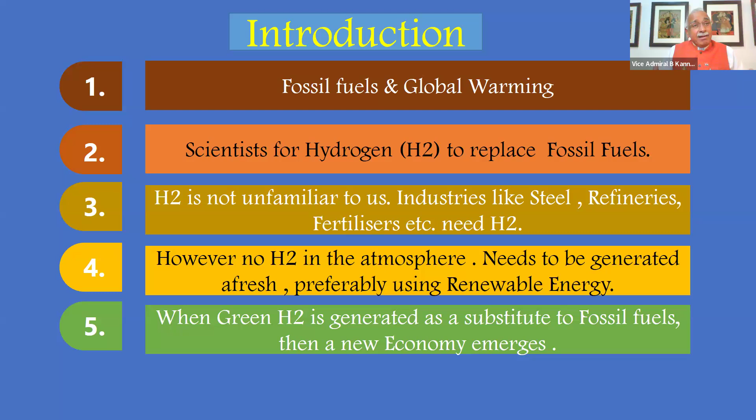So if green hydrogen is generated, that means you use renewable energy to generate hydrogen, then you get it almost free. Sun's energy you get free. You have to spend some money on solar panels to generate electrical energy, and use that for getting green hydrogen through some electrochemical process. Then you have the substitute hydrogen available to replace fossil fuel without very much expenditure.

And that is the emergence of a new economy. A new economy evolves when you take hydrogen by some process from nature, using sun's energy, and then use it for industries. Obviously it should give you some benefit. We'll discuss that, and how does this economy work.

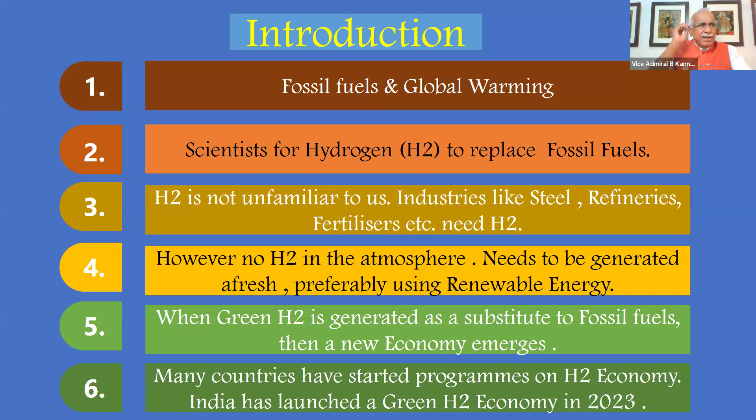What is India's plan? Where are we now? What is holding it up? That's what we're going to discuss in the next half an hour. Many countries have launched programs. India has also launched it in 2023, as I told you.

So let us see hydrogen very briefly, because that's very important to understand. Hydrogen, H2, which is what I'll be referring to, is colorless, odorless, and very light.

Can you believe that 1 gram of hydrogen occupies 11 liters of volume? It is so light and so much volume it occupies. 1 gram is equal to 11 liters. So it is a gas which occupies a lot of space. If you compress it and cool it, the volume comes down, but at normal conditions of temperature and pressure, it occupies a lot of volume.

This is the nature of hydrogen, which poses some problems as you go along, we'll discuss. It doesn't get dissolved, highly inflammable, and it's got high energy content. It can deliver energy to another place where it combines with oxygen. We'll discuss that as we go along.

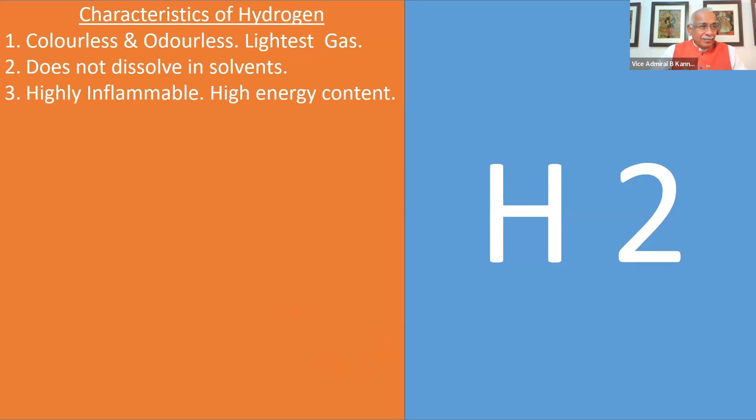It is required for many engineering applications. I already told you about steel, fertilizer, etc.

Atmosphere presence is very, very small. I've given the figure there. So it is actually not existing in atmosphere, but abundantly available in the universe. Water is H2O, so hydrogen is available in water. Hydrogen is available in fossil fuel also, be it coal, be it petrol, diesel. They're all compounds of hydrogen.

So hydrogen is available, but you have to take it out of water. You have to take it out of these chemicals.

Voluminous gas, I told you. So transporting hydrogen, one has to be very careful. It is risky, so normally they transport it as a compound, and later you can take out hydrogen from it, like ammonia. NH3 is ammonia, that is one way of transporting it when you want to transport large volumes of hydrogen.

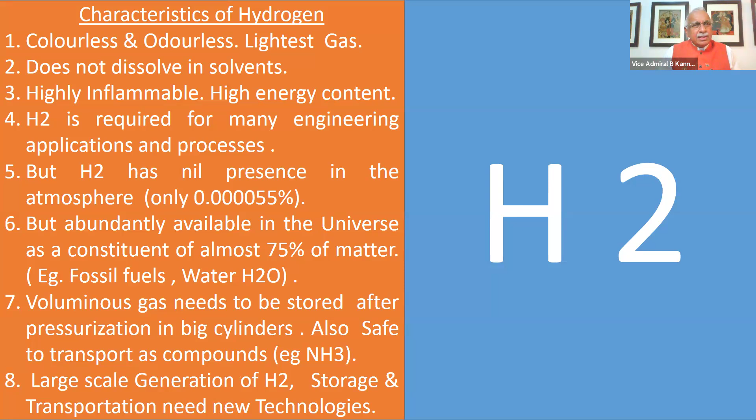So we have to generate hydrogen to get fuel, the new fuel, and then we have to store it, transport it, and give it to hydrogen bunkers, like petrol bunkers, and then they should be able to distribute. So there are a lot of new technologies involved, and we must see how India is coping with all this in the hydrogen economy program.

So environment has got water and air. If you give water, which is H2O, you can generate hydrogen, transport it, utilize it in some industry like steel, cement, etc. And there again it will come back to water because it takes oxygen from air and water comes back to environment. So this is a sort of hydrogen cycle which is abundant in nature.

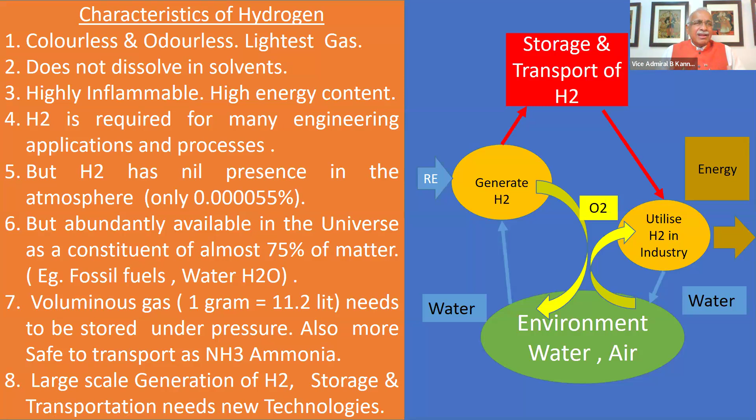So much hydrogen is available, we have to only spend time. We have to find methods of generating it, mostly from water. So who all require hydrogen now? Let us see.

First is steel. Iron ore is given to furnace, then you get pig iron and steel. I'm not going to discuss those issues, but hydrogen is required in the furnace so that the oxygen in iron ore is taken away by hydrogen to form water. It will become steam and go out, and the iron is separated from iron ore, which is converted, purified, etc. to form steel.

But iron ore also has got - how do you get the heat? You have to heat the furnace and pass hydrogen to get this. And heating is done by coal, and coal and oxygen react to form carbon dioxide, which is what you're worried about because of CO2.

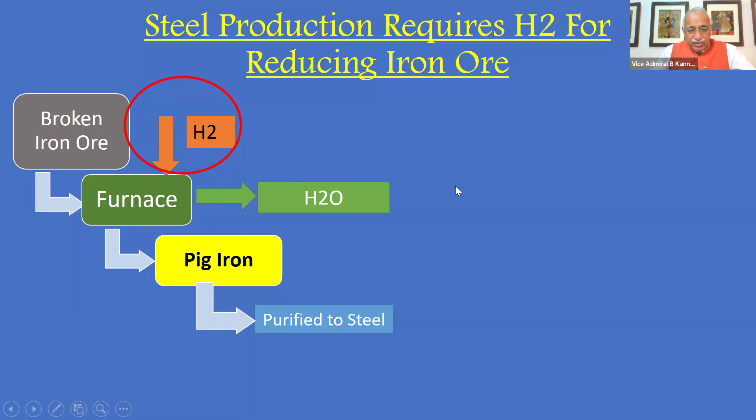So India has got about 50 steel plants producing 150 million tons a year. All of them use hydrogen generated from a coal-based process. That means coal is heated up, steam is passed over it, steam is splitting into oxygen and hydrogen. Hydrogen is available separately for the steel manufacture, and coal carbon forms carbon dioxide and pollutes the atmosphere.

If you can give this hydrogen by some other method other than burning coal, then we may be able to reduce the carbon dioxide emission, which is causing global warming. Just to give a detail, 50 kgs of hydrogen is required for 1 ton of steel to be made, so a large volume of hydrogen is required.

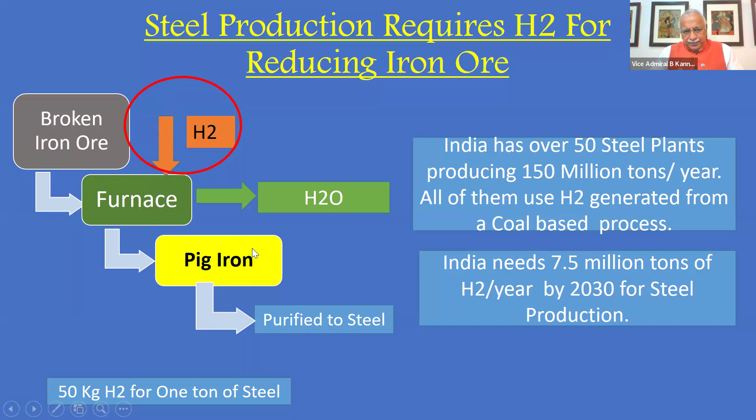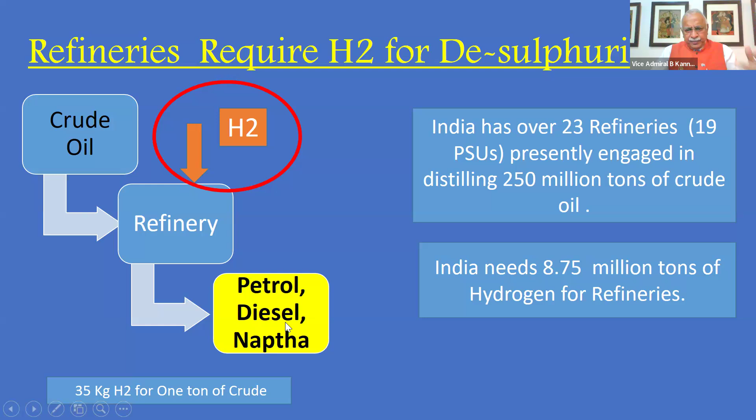Through this, you have to feed it from somewhere, how to feed it we will see. I will just take refinery. Refinery also requires hydrogen for desulfurization of the fuel, petrol. So this hydrogen is also produced by a coal process, and they pollute the atmosphere, and you get petrol, diesel, naphtha, etc. But it requires 35 kg hydrogen for 1 ton of crude to be refined. There are 23 refineries in India, details are available on the slide.

Chemical industry, ammonia to be made - again hydrogen is required. How is hydrogen bought? Hydrogen is made from coal being heated up and steam passed, and hydrogen comes out, and CO2 gets emitted from the factory, polluting the atmosphere. So I give you 3 examples: steel, refinery, and a chemical plant producing ammonia.

All of them require hydrogen, and they get it by burning coal and passing steam over it. Steam is H2O, so it splits. H2 is collected separately; oxygen combines with carbon, and this is carbon dioxide. Now, this is a big issue. If you continue like this, global warming cannot reduce, because one of the important aspects in global warming is burning of coal. That you should reduce.

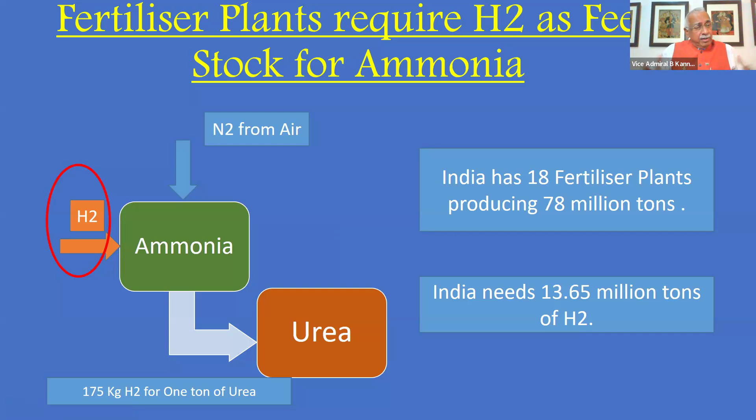I'm talking only about industries where coal is burned for producing hydrogen. Suppose you can connect a pipe here, with hydrogen coming from somewhere else; then the coal need not be burned. In all those 3 factories, you remove the coal and put a pipe which will give you hydrogen. A big pipe which will carry lots of hydrogen to the ammonia plant.

So let us see how hydrogen is produced in fertilizer plants. As I told you earlier, there are 2 ways. One is coal is burned in a furnace with steam. Syn gas comes out, carbon monoxide and hydrogen, that is separated. Hydrogen comes out separately. Carbon dioxide comes out as a black cloud to the atmosphere. If you burn coal, this is your output, hydrogen and carbon dioxide.

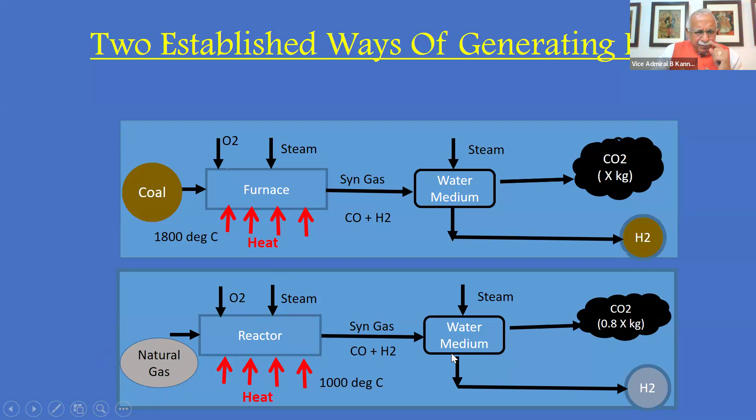Another method is you burn natural gas. Natural gas is a little expensive for India because we don't have too much natural gas reserves, so coal is cheaper for us, so mostly we use coal. But many of the ammonia plants, etc., use natural gas; cement also uses natural gas. Natural gas is burned, same technique, same method. CO2 comes and hydrogen comes out. Here CO2 is less. You can see the black cloud is slightly smaller. There's a difference between these two.

When you burn coal, this hydrogen is called brown hydrogen. That's a name given. If you say brown hydrogen, that means you're burning coal. And it is given to steel, refinery, fertilizer plants. So I told you when the pipe comes there, it actually comes from here. This is a part of the factory which is elsewhere, and from there the hydrogen comes. Suppose you burn natural gas, it's called gray hydrogen, and that is mostly used in fertilizer plants. So this is how it is being done today.

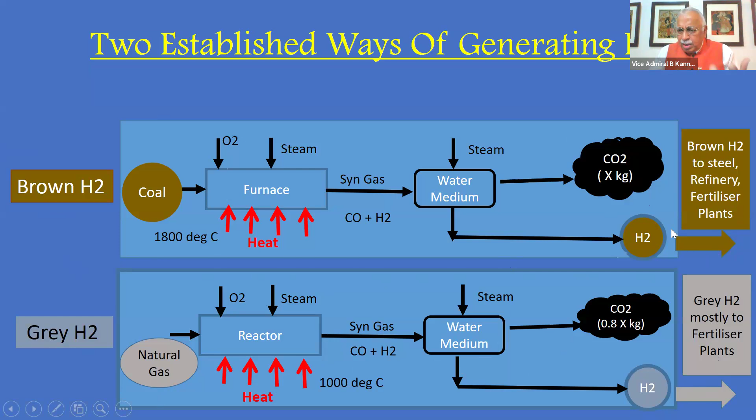But both gray and brown emit carbon dioxide. Brown emits more, gray emits less. But they are causing global warming. So India's total emission of carbon, if you look at it, 25% is by industries, all industries put together. 45% is by power generation, thermal power plants producing electricity for you. They burn coal, they produce steam, steam turbines produce electricity, and you get electricity in your house. Industries get it, hospitals get it, everywhere. Supply is given by power generation.

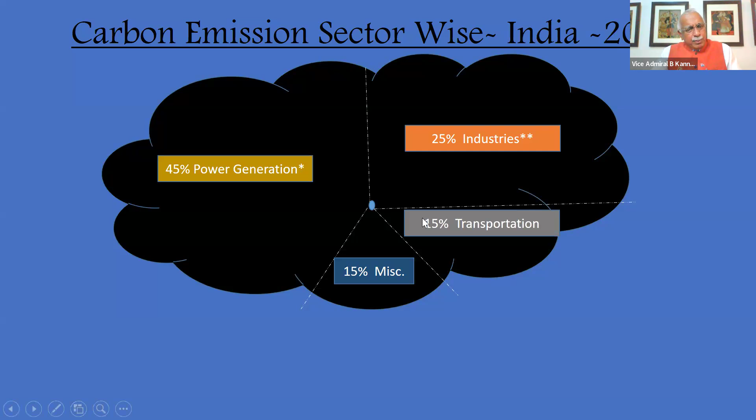So 45% comes from power generation, 25% is industries. Transport, trucks and buses which run on diesel, produce a lot of smoke; cars, which run on petrol as well as diesel, produce less smoke because of smaller engines, and that is about 15%. Otherwise, there are some other emissions which are about 15%. So India's carbon emission is 4,100 million tons every year, and it is not reducing, it is only increasing, and we are causing more global warming. So it's a serious issue for us that we have to reduce the size of this black cloud by some method.

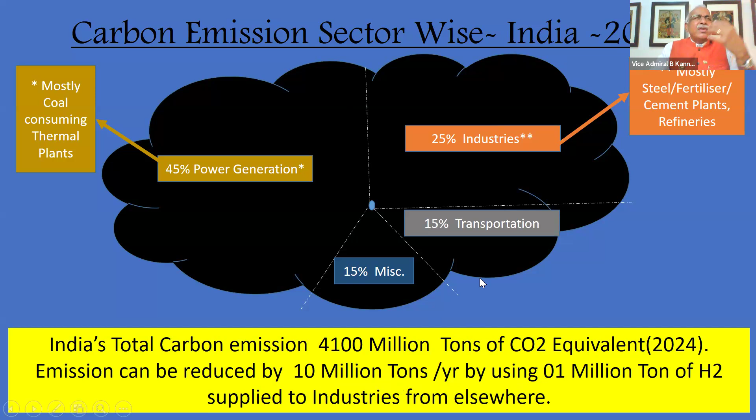Now, go back to industries. If you can give the industries hydrogen through some other pipe coming into the factory, then they don't have to burn coal. The carbon emission reduces. It will reduce by 10 million tons every year if you use 1 million tons of hydrogen. So you require lots of hydrogen to be produced by some method. What is that method? We will see.

So the method used for green hydrogen is electrolysis. All of you have learned in school: if you split water using a battery supply, you will get hydrogen and oxygen in a 2 to 1 ratio. Now you have to produce lots of hydrogen, so you have to go for an electrolysis plant, and the plant will be something like this. This is the first plant made in India, in Hazira, in Gujarat, by Larsen and Toubro. They have designed and made this. You can see how big that electrolysis plant is.

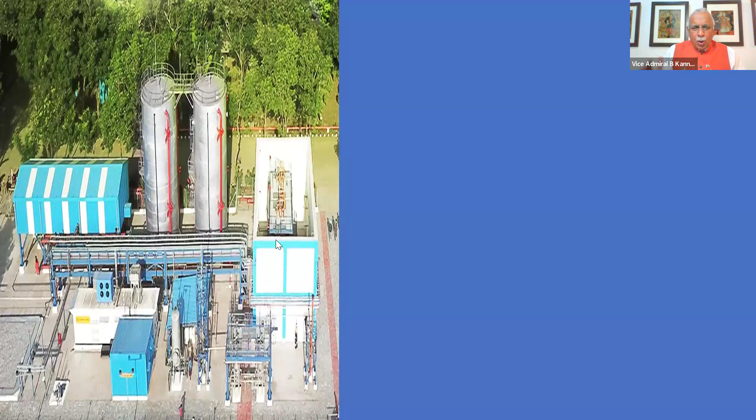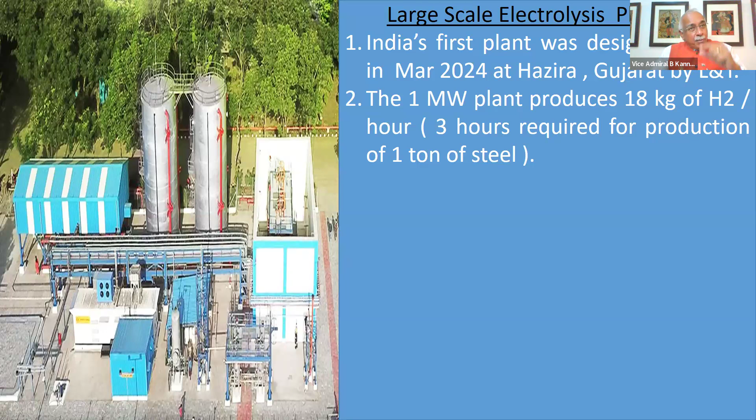It works on 1 megawatt of power, and it produces in 3 hours whatever hydrogen is required for 1 ton of steel. And India is producing 150 million tons of steel. So you can imagine how much green hydrogen is required, how many electrolysis plants are required at different places to produce hydrogen without burning coal. Obviously, a lot of money is required to make all these electrolysis plants. They may work on solar, but these electrolysis plants have to be made by us to make sure you don't burn coal.

Now, if you get hydrogen from an electrolysis plant which is running on solar power, it's called green. Earlier, I told you brown is for coal and gray is for natural gas. Now, green is for solar energy. And if you want to make 1 million ton of green hydrogen, 1,000 plants like this are required.

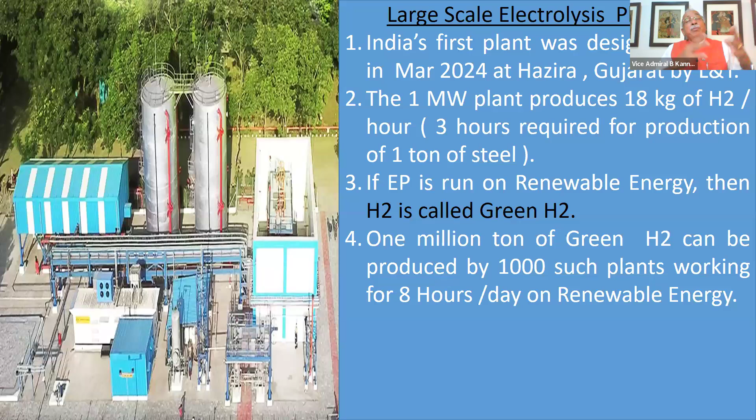1,000 plants are required. And you have to put these plants very close to steel, cement, fertilizer, refinery, because the hydrogen pipe has to go inside. You can't run it over kilometers and kilometers. So you have to co-locate these electrolysis plants, hundreds of them next to each refinery, or produce a very big one which has got the capacity of 100 such electrolysis plants. This is the first one which has been made for 1 megawatt.

So the government has formed a national mission to make electrolysis plants in plenty, design them, build them, and get them fitted in various industries which are burning coal. So that is the first step. So what are the challenges? I've got 5 challenges.

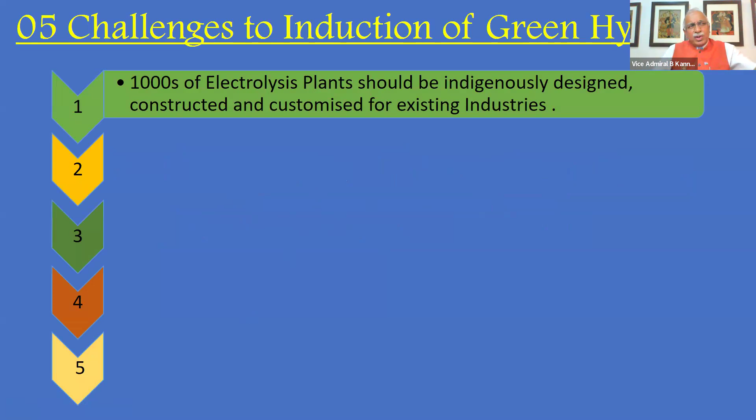The first challenge is the thousands of electrolysis plants that we make in the country. They had to be fabricated, constructed, and fitted and customized to the industry which is going to use it, depending upon what pressure of hydrogen and what flow of hydrogen they want. Second, they have to be fitted inside the factory premises, so that you don't run long distances of pipes or have to send by trucks.

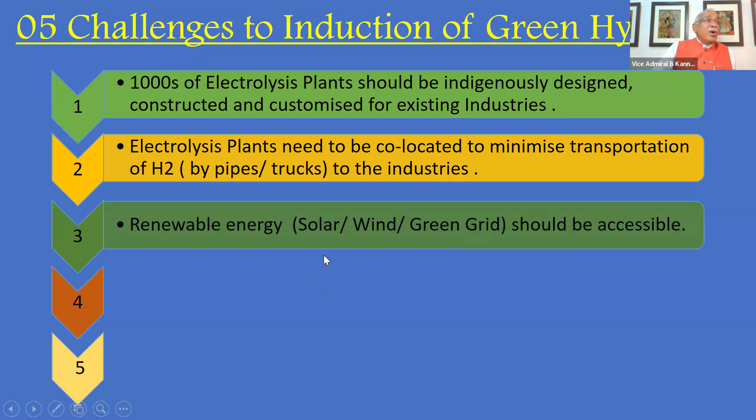And they have to work on renewable energy, so you require a solar farm somewhere nearby, or you have to get it from a green grid, so that you're not using energy from a thermal power plant which is burning coal. Then it is not worth it. You have to use solar or wind energy only. You have to use renewable energy. In India, for information, nuclear is also called renewable. Hydro is also called renewable. So we will generally say renewable energy is required.

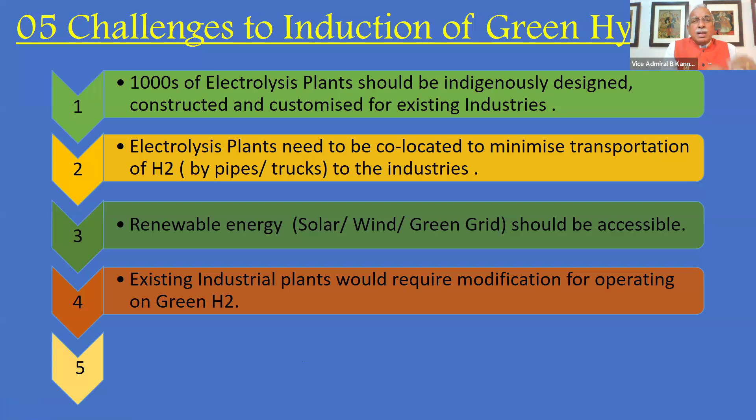And most important, the industrial plant which is presently burning coal has to be modified to take hydrogen from somewhere else. So the coal side has to be closed down and the hydrogen pipe has to come in. So some changes are required in that factory. And you have to keep the cost of this green hydrogen as low as possible. Otherwise, your green hydrogen mission will not be cost effective. It's an economy which has to run. So you have to minimize it by making sure green hydrogen is used elsewhere also.

So what is the thrust of this mission? Produce lots and lots of green hydrogen, give it to the industries wherever they are using coal or natural gas, give it to cars and trucks to run on green hydrogen, use it for power generation by mixing it with natural gas, or give it for cooking in your house, again by mixing it with natural gas. So these are the various ways you can use the green hydrogen which you produce from solar energy.

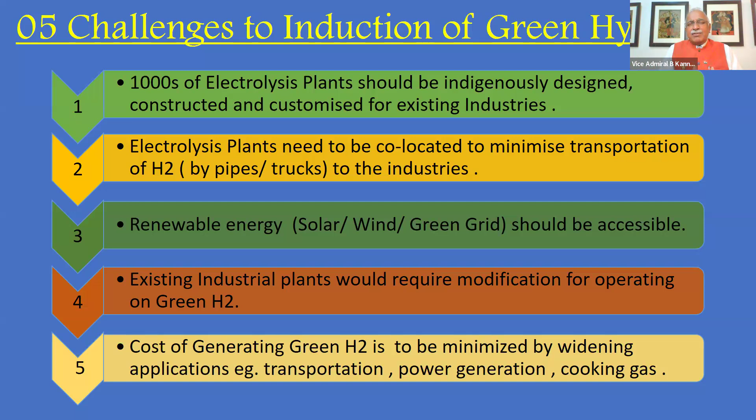Why do you want to produce so much green hydrogen? Unless you go on a very high scale of producing green hydrogen, the cost per kilo of hydrogen will not come down. And that is important for this economy. So there are challenges, but the most important challenge is making lots of electrolysis plants, getting them fitted near the industries, and modifying the industrial plants to take hydrogen from another source and not burn coal.

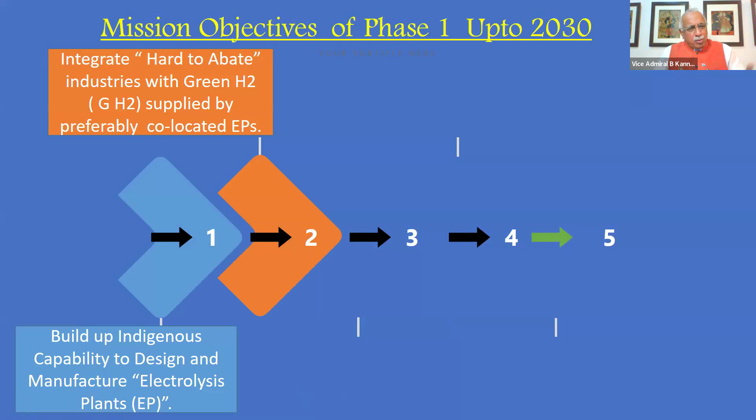So a national mission was launched 2 years back. It has got 2 objectives, one for 2030 and one for 2050. I'll quickly run through 2030. First, as I told you, make lots of electrolysis plants. I'll call them EP. Second, give them to those industries which are burning lots of coal, and they are called hard to abate. It will be very difficult to change these industrial processes that easily, but we have to go through it to stop coal burning and go for green hydrogen.

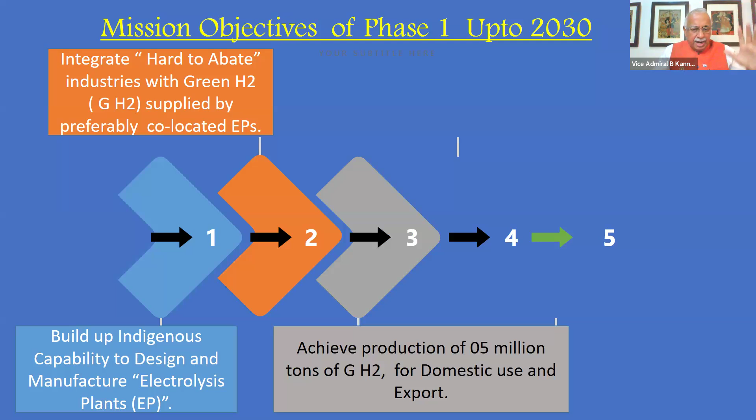Third, we want to produce 5 million tons by 2030. That's what the government says. Where we will reach in 2030, I'll tell you later. But the government says we want to reach 5 million tons by 2030. Then give green hydrogen.

I told you, produce 5 million tons is lots of green hydrogen. So give green hydrogen to thermal power plants which are burning coal, don't take coal. There you use natural gas and blend it with green hydrogen. Give green hydrogen for trucks, cars, and even for gas supply to your house, piped gas supply to your house.

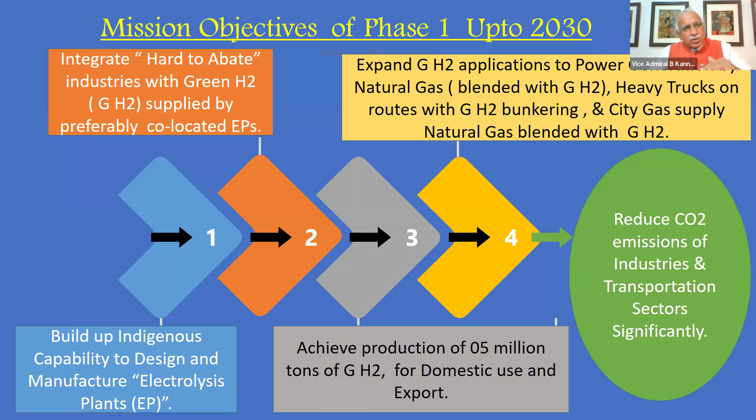So this is what is being planned, and they want to reduce the emission of carbon dioxide from industry, transports, and even domestic sectors. By 2050, the goals are even bigger. The mission says we'll produce 28 million tons. That's what the aim is, almost 90% with green hydrogen. You can also have normal electricity being used for hydrogen. Then it is not green. It will be called by some other name. But 90% they want green hydrogen.

They want to export green hydrogen to Japan, Korea, and European Union because they don't have so much of solar energy like India has. They are up in latitude. They don't get solar energy as much as India gets. So India has got an advantage. Lots of solar energy in India. Utilize them to produce as much green hydrogen as possible, which is the fuel for tomorrow.

Like Middle East has been giving lots of oil for the last 100 odd years. Now onwards, whoever gives a lot of green hydrogen will be having the position of power because that is the new fuel. But it has to be green. It has to be based on solar energy. And countries close to equator will have the capability, the resource to produce green hydrogen.

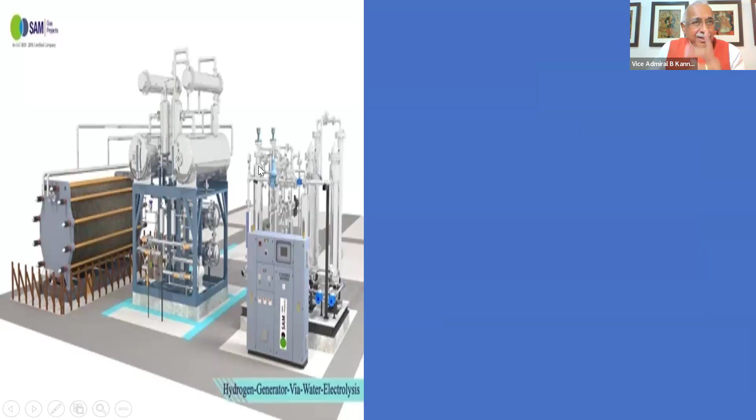So I will talk about the present status of phase one. Phase one is 2030, you may remember. At present, we have started making lots of EPs, electrolysis plants. It has been set up in Hazira, I told you, by Larsen & Toubro, then in Bikaner by a company ACME. GAIL has got one in Vijaypur; BPCL, HPCL, NTPC, all have small electrolysis plants. Why small? Because it's a technology initiative. It is being inducted. They want to get familiar with the technology of the electrolysis plants and how it will produce the desired hydrogen pressure for that particular industry.

So the moment they are comfortable with it, they will expand and produce as much hydrogen as is required to reduce the coal burning. I'm not saying coal burning will become zero, but they will significantly reduce it. Today, we are only producing 38 megawatt of green hydrogen through electrolysis plants, which produces 8 tons a day. That's about 2,500 tons a year. But we want to produce 5 million tons. A long way away. We have to do huge upscaling of electrolysis plants and integration with industry by 2030.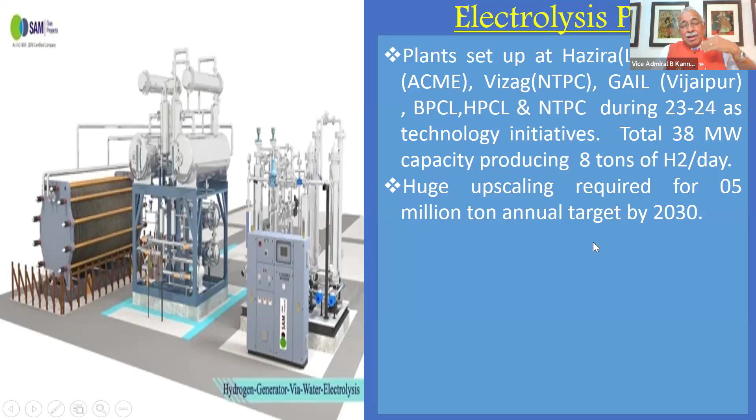Will it happen or not happen? We'll discuss. What government has done, they have shortlisted 8 firms for producing EPs, electrolysis plants. And PLI scheme is being implemented so that their production goes fast. So far, it has not started. The firms have been identified, but the contract has not been signed. So another 1 more year. So it will be 2026 by the time it starts. So the 2030 target is doubtful.

5 million tons of production of green hydrogen is almost ruled out. I don't think we will reach there, but it will be something lower than 5 million tons. I've done some calculation, I will tell you.

Meanwhile, India and Egypt have signed a joint venture to set up near the Suez Canal to produce 20,000 tons of green hydrogen, so that many operations which are required in the Suez Canal can be run on solar energy. This is just for information for you, because Egypt does not have that much of a technological base, so India is giving the support.

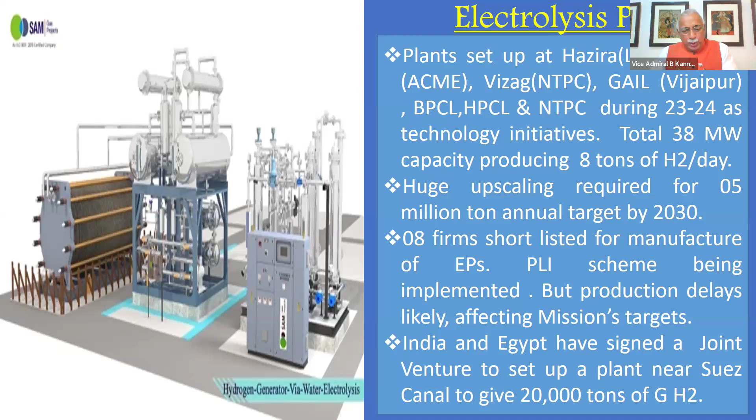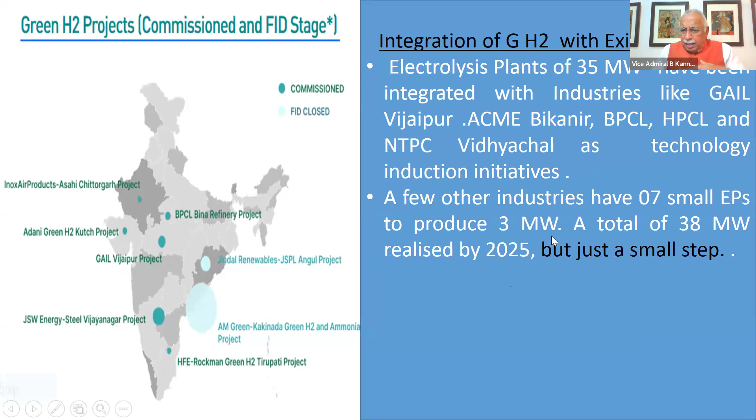Now, the integration with industries is happening in all these places which I told you some time back, where electrolysis plants have been set up. I told you 35 plus 3, total is 38, but that's only a small step. We require 11,000 megawatts of electrolysis plant for 1 million ton. For 1 million ton of gas to be produced, 11,000 megawatts of electrolysis plants are required.

That means they should be drawing that much power from the grid or solar farms or green grid to run and produce the hydrogen we want. And if you want 5 million tons, 55,000 megawatts is required. Now, this is not going to be achieved by 2030. Even though the hydrogen mission is very optimistic, I have my own doubts whether they will reach there, because electrolysis plants are still not made. They're only made as samples, and initial kits have come out.

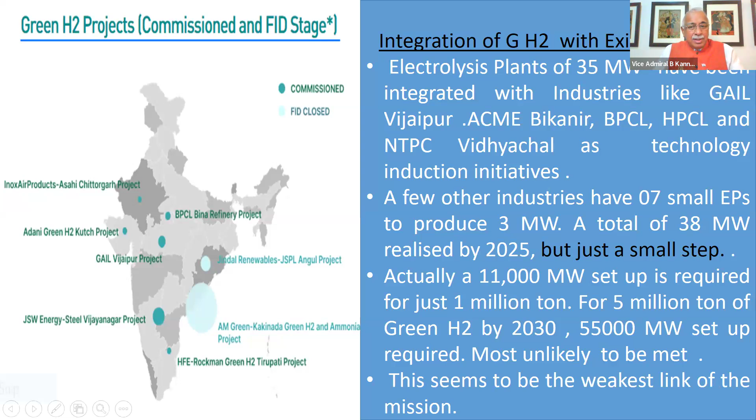So the PLI scheme is yet to kickstart. So this is going to be a problem area for us, and this is going to be the weakest link in the mission. It's not solar power. We have already gone to 150 gigawatts of solar power in India, so solar power is behind us. We can generate. But electrolysis plants, which will produce hydrogen, need to get ready. Thousands of them. And we have made only some small numbers, about 15, 16 of them so far.

Meanwhile, Leyland and Tata have both made trucks which will run on green hydrogen. They have been successful in doing it. So what the government has done, they have identified 10 sections of highways, in the eastern corridor and western corridor, where lots of industries are there in Maharashtra, Gujarat, Andhra Pradesh, Orissa, Tamil Nadu, and I think one portion in Kerala is also there, where they have identified those highways as green highways for green hydrogen trucks.

Why do you have to identify? Because along these highways, like petrol pumps, you require green hydrogen bunkers so that these trucks can take fuel from there. So the trucks are getting ready. The truck sample initial run is already completed, and now production has to start at Leyland and Tata. They will run only on the route which has been identified, because that's the only place where they will get the hydrogen fuel.

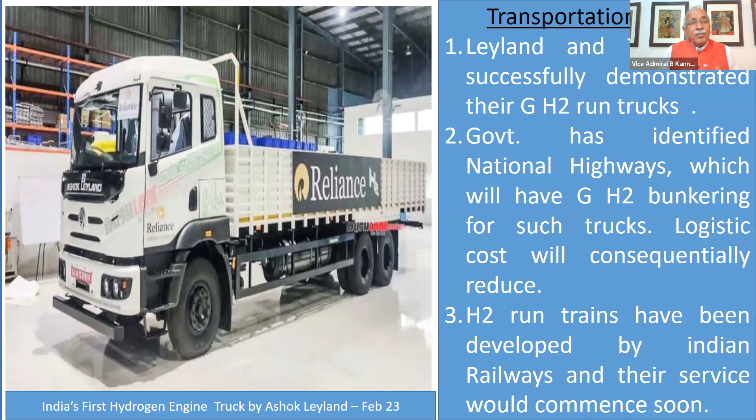In addition, the government has made the first hydrogen train. It was ready by the middle of August 2025. It is a 12,000 horsepower train. This will run between Jind and Sonipat section of Northern Railway. And this is going to do the trial run very soon. The date was sometime in December, but I'm not sure whether the date will still be met.

But it is out of the factory which has made this hydrogen train. Now the train has to do some trial runs and it will start on this particular section very soon. So on the transportation side, trucks and trains will happen from 2026 onwards. But I don't think cars will come. Even though theoretically it is possible to run cars on hydrogen, I think cars running on hydrogen fuel are not there, as per me, for the next 5 years. It's not going to happen.

One or two cars may run here and there for demonstration, but they will not be available from car manufacturing plants to the public. Definitely not before 2035. After that, you may find some models come out. It has advantages, but at the moment the focus is on electric cars, EVs, which are also going to reduce pollution. So that's a good thing. But hydrogen cars are not going to be there soon.

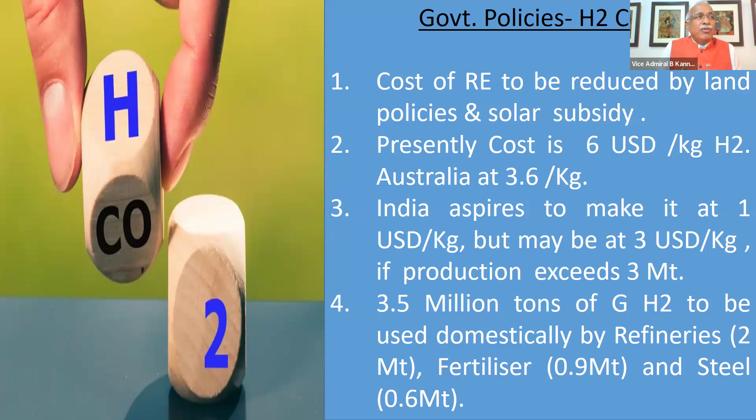Steel is not so enthusiastic about producing with green hydrogen, because a lot of consumption of steel takes place within India. It's okay. But if you want to export steel, which we are doing presently, you will get a higher rate if it is using green hydrogen, and it's called green steel. So if you want to have higher business in steel and exports, then you have to produce green steel. I think Jindal's JSPL plant in Orissa is trying to be maybe the first plant which will produce green steel in India.

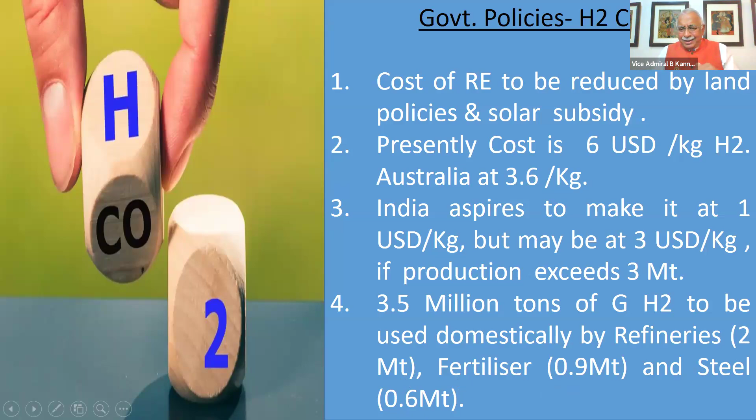But as it stands, refineries will take 2 million tons, fertilizer about 1 million tons, and steel plants much less.

So let me come to the conclusions of today's techno-economic talk. We are talking about the green hydrogen mission.

The first conclusion is we have initiated projects on the engineering side: electrolysis plants, safety standards. As I told you, hydrogen needs to be handled with care. It's highly inflammable, so the safety standards required are different. R&D is required in storage, pressurizing compressors, and containers which can take hydrogen. If you want to export it, it has to be in huge drums which can take very high pressure.

And some renewable energy projects are also being started. It's a good effort which the government has done, and I think we've already kick-started this activity. 8 companies have been identified for making electrolysis plants. Good start.

We have made only 38 megawatts. And as I told you, 8 firms, but they have to produce thousands of electrolysis plants, which will utilize at least about 33,000 megawatts of power to produce 3 million tons. Now that is going to be difficult, and a lot of effort is required to achieve that.

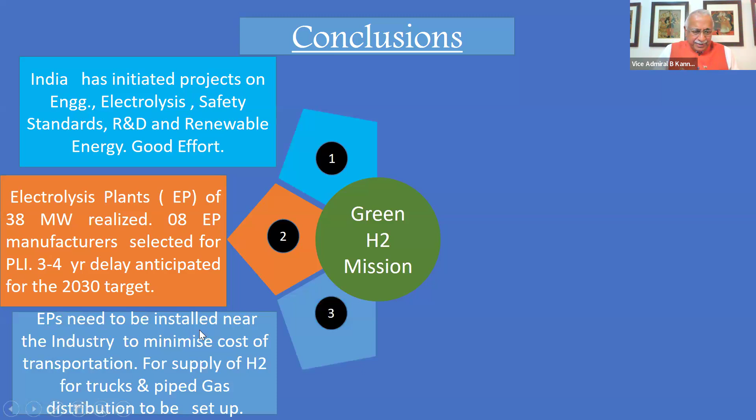Now the third conclusion, which is emerging from the challenges: you can't have the electrolysis plant here and the steel factory 10 kilometers away. You'd require 10 kilometers of pipe. So put the electrolysis plant near the steel plant, preferably inside the steel plant premises, so that it closes down the coal burning and takes green hydrogen from the electrolysis plant located nearby.

Now, if you want the electrolysis plant output to be given for trucks and piped gas, obviously you'll require bunks to be set up along those identified highways. If you want distribution done in a particular city, then you require to lay pipelines, like many cities have got natural gas being distributed. Bombay has definitely got a huge portion, I think Cochin is also going to get it, and maybe a few other cities as well. So this is going to pick up.

But if you want to mix green hydrogen with natural gas, trials of about 5% mixing have been completed. Maybe it'll go to 10% or 15%. Once you do it, hydrogen's energy can be used for burning the kitchen burners in the house.

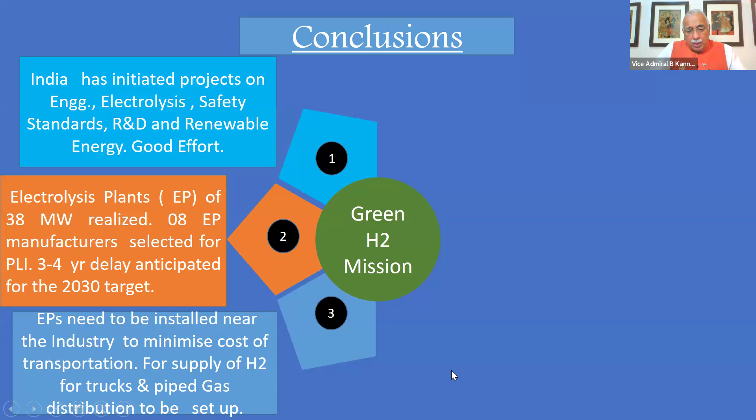Then the solar farm is also required to be near the industry, because the electrolysis plant is going to be near the industry, and the power required for it has to come from the solar plant. If it is kilometers away, then you have to run overhead grid lines, cables, etc. To minimize that, you want it closer.

So land is a huge and very important commodity - large areas are required for green hydrogen. That is a challenge which some states will find difficult, to give land for all these electrolysis plants and solar farms. In some places it may be easier. It's going to be industry location-specific, but I don't see any major holdup. Solar farms can be at a distance, with power coming by grids from there, but electrolysis plants need to be located near the industry.

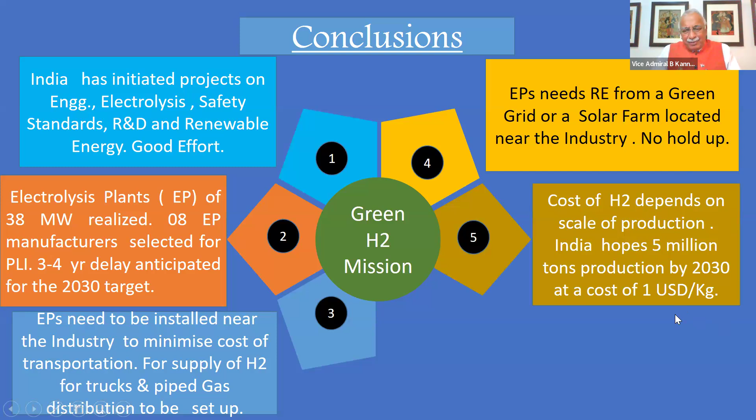Cost of hydrogen we discussed. We want to make it $1, but it's not going to happen. At best, I think we'll produce it at $3 per kg by 2030. Even if that happens, I told you, your car will run 100 kilometers.

And the fifth one, you have to explain - okay, I'm restarting now. So the last point is, the government wanted to produce 5 million tons at $1 a kilo by 2030. Now that is not going to be possible from the way it is going.

Some study which has been done says that at maximum you will make 3 million tons, and it costs about $3 per kilo of hydrogen. But even if it is $3 per kilo, you will be able to run your car 100 kilometers for 300 rupees, which today is about 600 rupees on petrol.

So there's benefit. I'm just telling what the customer gets - the customer should find that the fuel available for transport is cheaper, the fuel available for power generation is cheaper, and cooking gas is going to be cheaper because it's going to be mixed with natural gas, and the heat content is going to be much higher. Most importantly, the pollution will be less, and as for global warming, India would have done its contribution to reducing it.